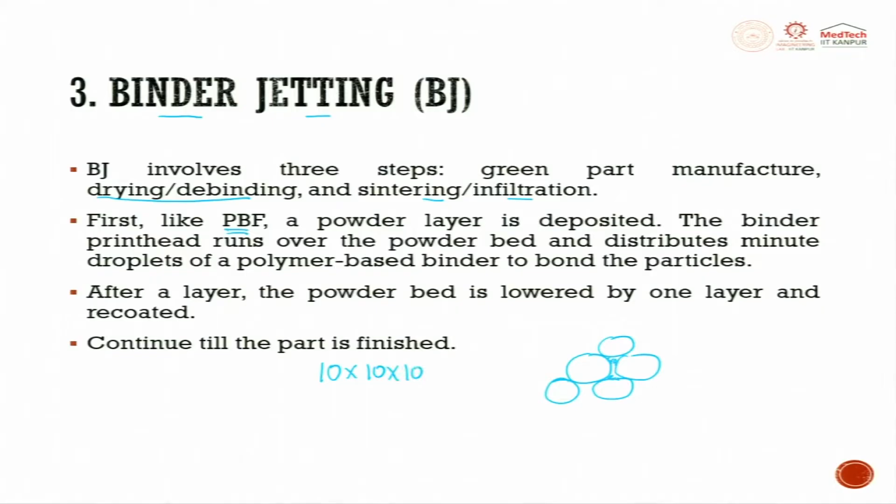Generally, if you are looking at somewhere around a 10 by 10 by 10 millimeter object, it will typically be made from somewhere starting from 1000 layers to 10,000 layers. If you do anything less than that, you get a very rough surface and the staircase effect dominates. So we try to maintain an optimum of 1000 layers, which means the machine will have to move up and down 1000 times to get the finished part.

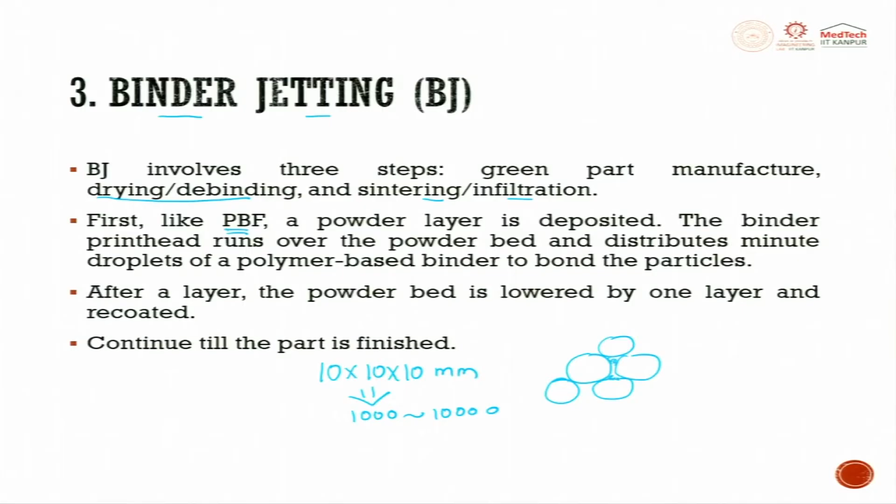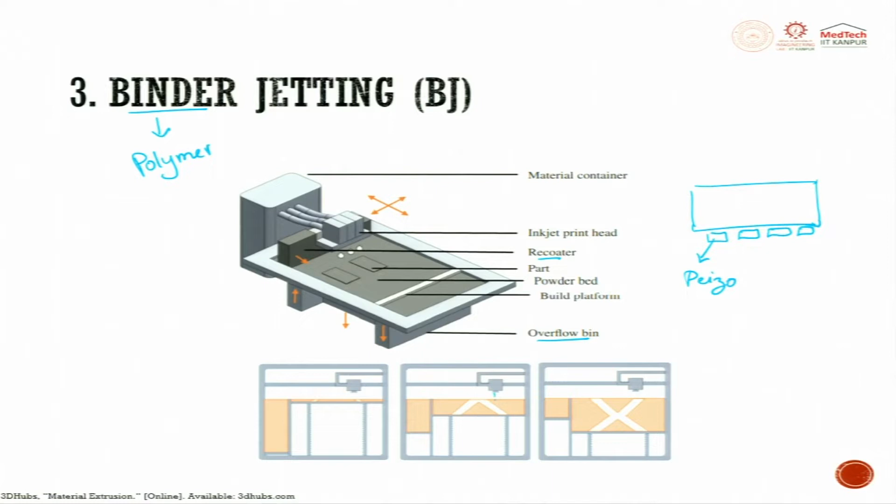So what is the advantage here? The shrinkage which happens can be reduced to a large extent as compared to that of laser.

Binder jet machine can regulate the build chamber temperature, which can be used to partially dry printed items. This is quite common in fused deposition modeling with polymers too, where there is also a build chamber temperature. Here, the build chamber temperature partially dries the printed item to prevent slippage when depositing the next layer, so the polymer will slightly evaporate.

The part stays in the machine until the binder is cured. After the process, nowadays along with the binder jet nozzles, there is drooping which happens.

Assume that next to the binder jet you have one more laser, a UV, deep UV, or blue laser. This laser tries to interact with the polymer and quickly cure it, which is called binder curing. So a laser gets attached with the binder jet to produce the desired output, and here the build chamber temperature will be regulated to some extent.

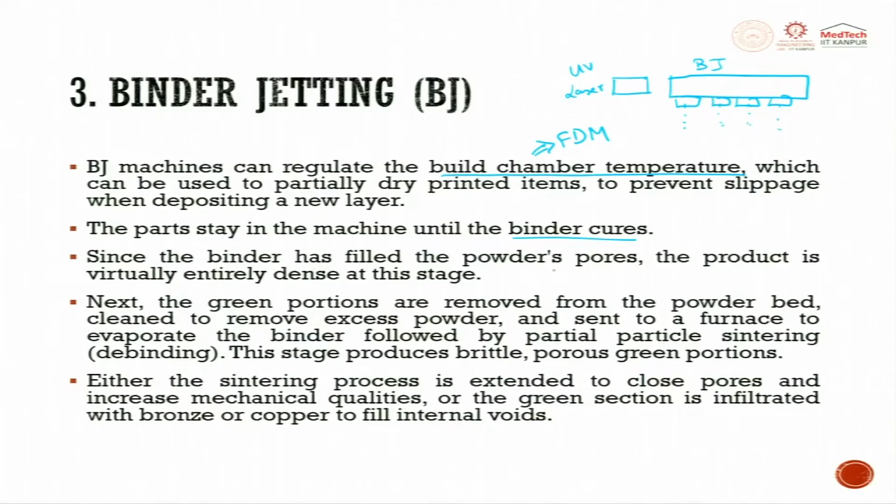Since the binder has filled the powder pores, once you do sintering you still have 95-96% density, with 3-4% pores remaining. That is where we try to do infiltration.

The part may remain in the machine until the binder cures, and you can use a laser for this curing. New machines are coming with this add-on feature.

Since the binder has filled the powder pores, the product is virtually entirely dense at this stage. It is called green - you can break it when you apply force, but once it goes to sintering it becomes hard. Next, the green portion is removed from the powder bed, cleaned of excess powder, and sent to the furnace to evaporate the binder, followed by partial particle sintering.

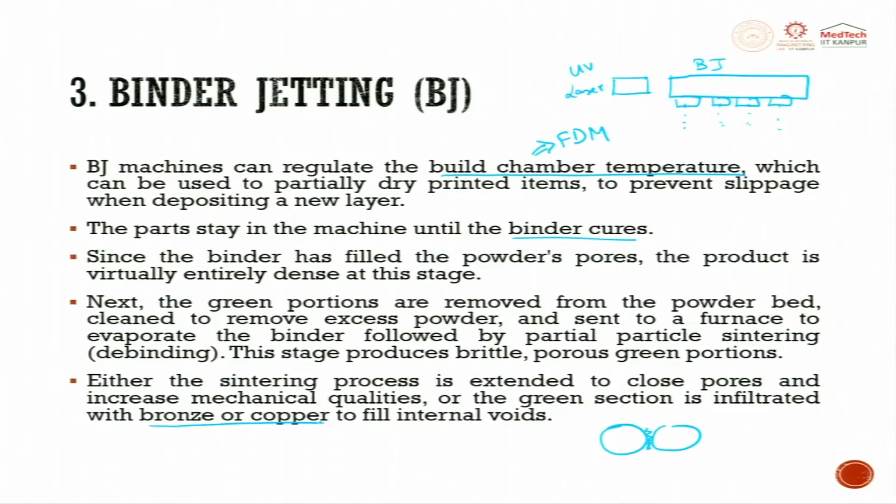This stage produces a brittle, porous green portion. Either the sintering process is extended to close the pores and increase mechanical properties, or the green section is infiltrated with bronze or copper to fill internal voids. So I have clearly distinguished between sintering and infiltration, which you choose depending upon your requirement.

When the copper is fed in, the copper's or bronze's viscosity is very important so that it can achieve capillary action into the part. Achieving capillary action is tough because the pore size is small and it is metal, so you need a very high negative pressure. Generally, it does not happen so easily.

If you still can't visualize it, imagine a sponge used for cleaning a table - as soon as you immerse the sponge in water, the water gets sucked into the pores. That is infiltration. If it happens by free atmosphere, it is easy; if not, you try to suck it in. So these things are done.

The first option shrinks the piece, which should be considered during design itself, because after this you go for sintering and there is going to be shrinkage, so a shrinkage allowance has to be given. The second alternative shrinks less and can be utilized to make two-material parts with tailored properties.

Binder jet made parts can achieve beyond 90% densification, although powder bed fusion and DED are difficult to match with this method. HIP reduces the pore size or porosity. Binder jet is a good production process for implants or structural pieces that require porosity.

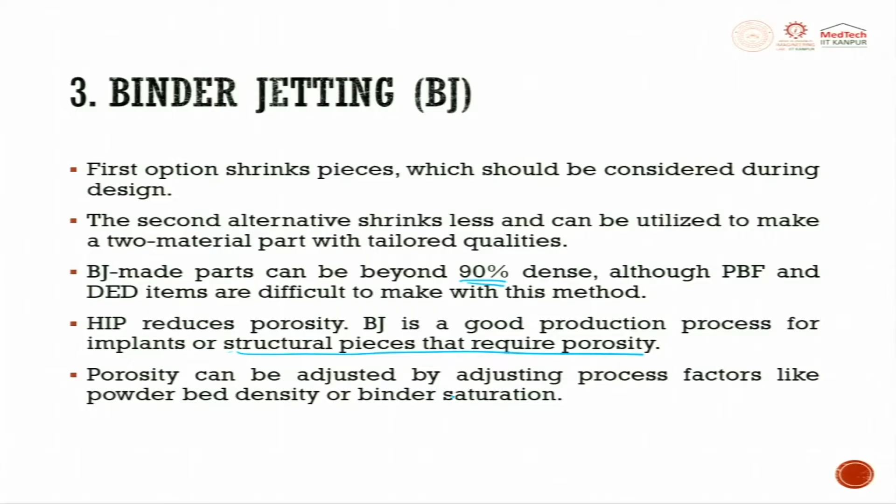This AM technique resembles powder bed fusion and material jetting - we will see what material jetting is later. It's similar to powder bed fusion with layered powder, but powder particles aren't fused with heat. Unlike powder bed fusion, they are bonded utilizing a binding liquid.

This is economically beneficial because laser and electron beam are expensive and require severe safety procedures. So, if you are looking for an economical way of producing metal additive manufacturing parts, binder jetting is one alternative.

The process is done in one place, and then you go to a sintering station next. In between you can try to have a drying station. These two steps do not involve much shrinkage, but during sintering there might be shrinkage. So, all these things have to be calculated upfront before doing the process.

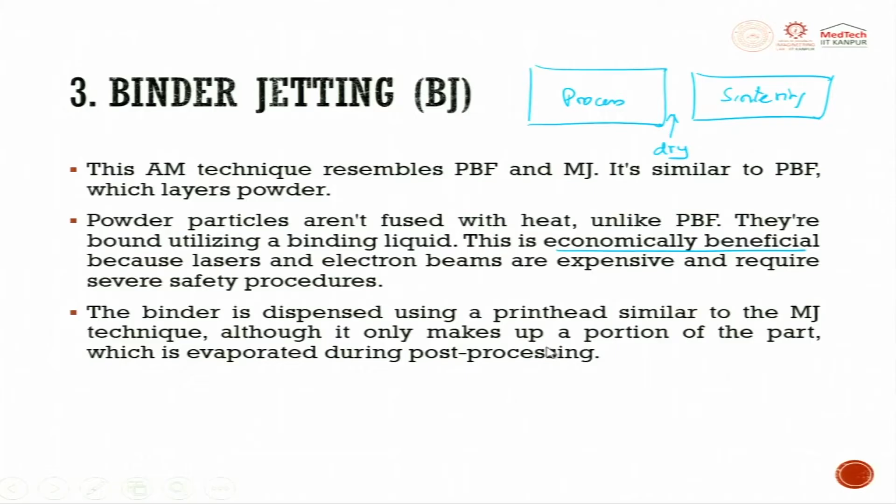The binder is dispensed using a print head similar to that of material jetting technique, although it only makes up a portion of the part, which is evaporated during post processing. Binder jet works very similar to your home inkjet printer.

In an inkjet printer at home, you see there are cartridges, and in those cartridges there are binders. These binders glue powder particles together instead of spraying ink on paper. This technology offers fast printing.

It is very fast. Today in additive manufacturing, especially in metal, we always look for productivity. So, this process helps achieve higher productivity, the ability to stack parts for efficiency, scalability, and print composition.

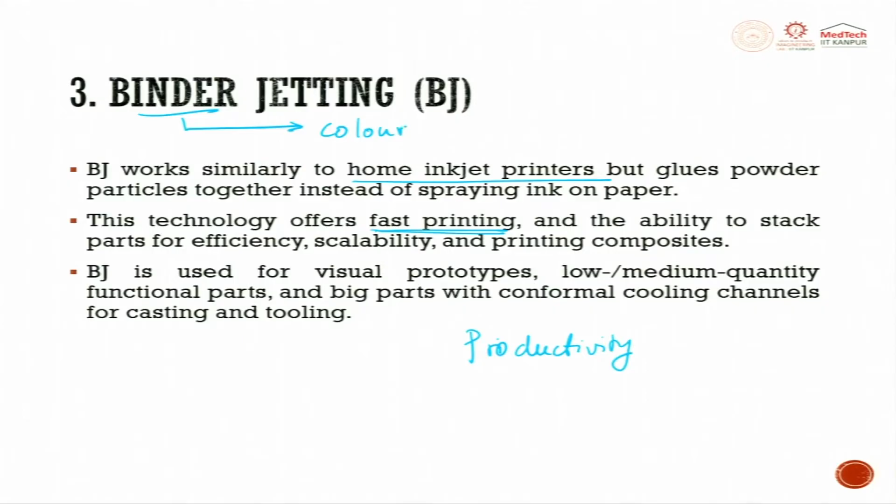Binder jet is also used for visual prototypes. In the binder, you can add color also for visualization. When you do sintering, the color will go off, but sometimes the color also gets retained. In the green stage, if you want, you can use it for visual prototyping.

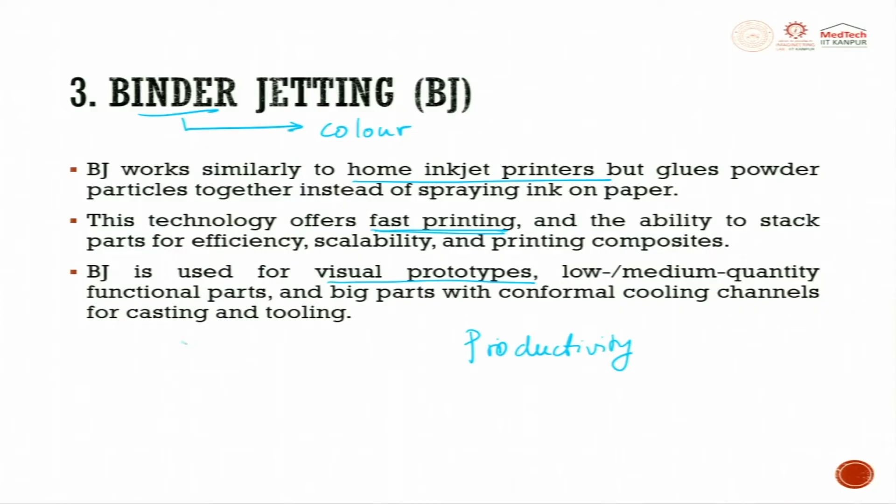Low medium quantity functional parts and big parts with conformal cooling channels for casting and tooling can be made using the binder jetting process. This is how the jetting technology works in action.

You also have the multi-jet fusion process. This method was created for non-metal powders and later used in metal systems by HP's new line of machines, metal jet. Two binders are placed on each layer: the fusing agent and the detailing agent. Two different agents are present, one called fusing agent, the other called detailing agent.

The fusing agent is deposited where particles must fuse to produce the part's cross section, that is fusing. The detailing agent is put around the fusing agent to define cross section borders. So two things are important: the fusing agent and the detailing agent, which together define the cross section.

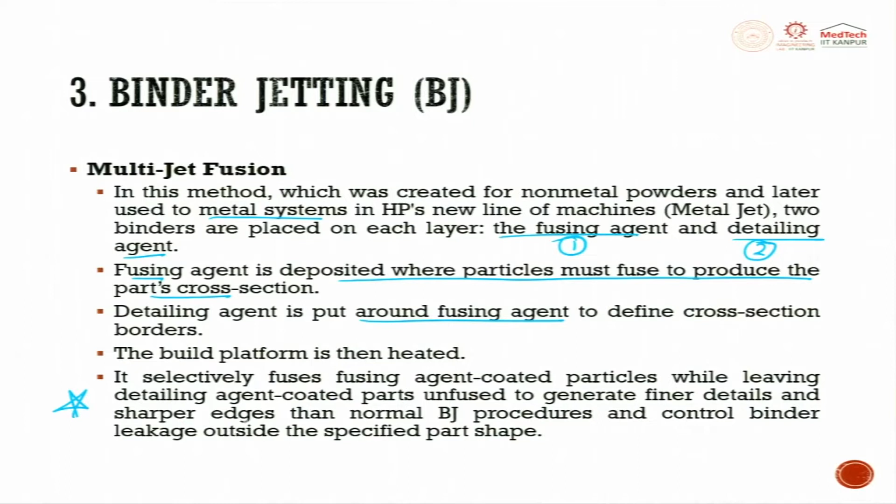This is a very important point to understand when we do multi-jet fusion or metal jetting. It selectively fuses the fusing agent coated particles while leaving the detailing agent coated parts unfused, to generate finer feature details and sharper edges than the normal binder jet procedure.

This is a schematic diagram for the multi-jet fusion technique steps. First, material is recoated, then thermal control energy is applied, then fusing agents and detailing agents are applied. Then it is exposed once again to temperature, so fusing is completed. You can see here which regions are fused and which are unfused.

The fusing agent is deposited through a piezoelectric inkjet nozzle. You will have several of these nozzles dropping fusing agent, and then detailing agent. There is a difference between these two polymers. Fusing happens on one side, and on the other side there is no detailing, which gives sharp edges between the unfused and fused regions.

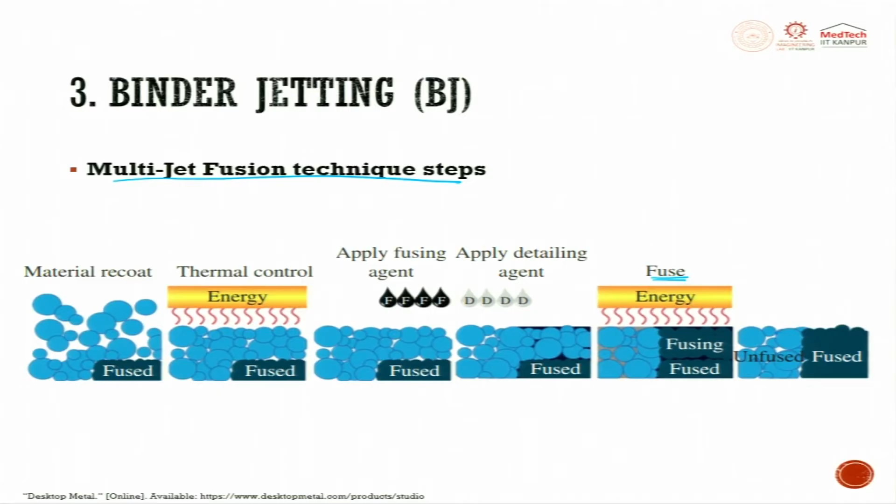This is a very interesting technique that is now gaining speed. Such wonderful details can be achieved by the binder jetting method. Here is a sample part made using binder jetting technology, showing wonderful features, hollow sections, and voids that can all be created.

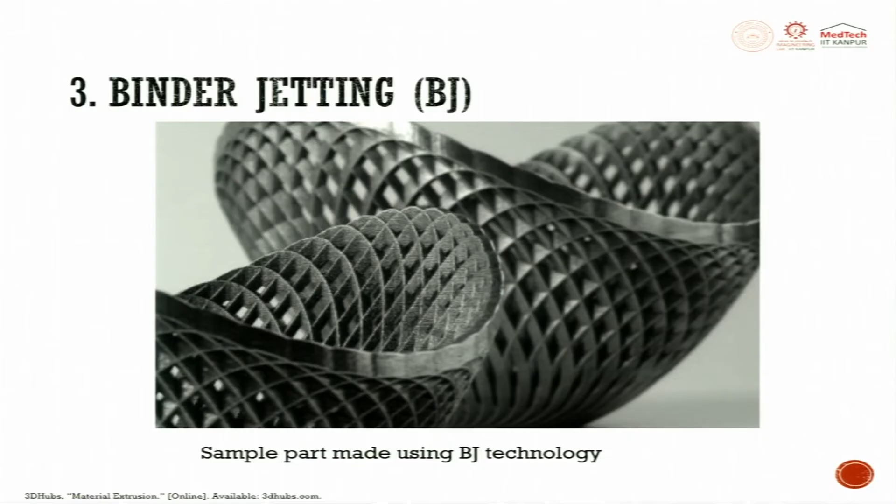Now let us look at the process features.

Great vertical resolution is attributed to tiny powder layers, so vertical resolution is extremely good due to tiny powder. Powder size is to some extent proportional to the roughness, because later when you fuse it these things go up, but to some extent. So in this technique it is almost proportional.

This technology's lateral resolution depends on the droplet size, quality and uniformity on one side, and their wetting properties on the other. What is wetting properties? When a liquid drops on top of a powder, or let us take a sheet of powder or a steel sheet, when a droplet falls on top of it, the characteristics of the droplet can be that it stays there rolling, or it can go down completely wetting.

So this is the powder or the sheet. Now here it is just spreading outside. When the wettability is good, it spreads outside, so you will try to have maximum contact. When you look at a powder microscopically, it will have surfaces like this. So when a droplet lands, through these small ridges, the polymer or the binder will have a capillary action and it can spread. That is what we are trying to talk about, the quality and uniformity and their wetting properties on the other.

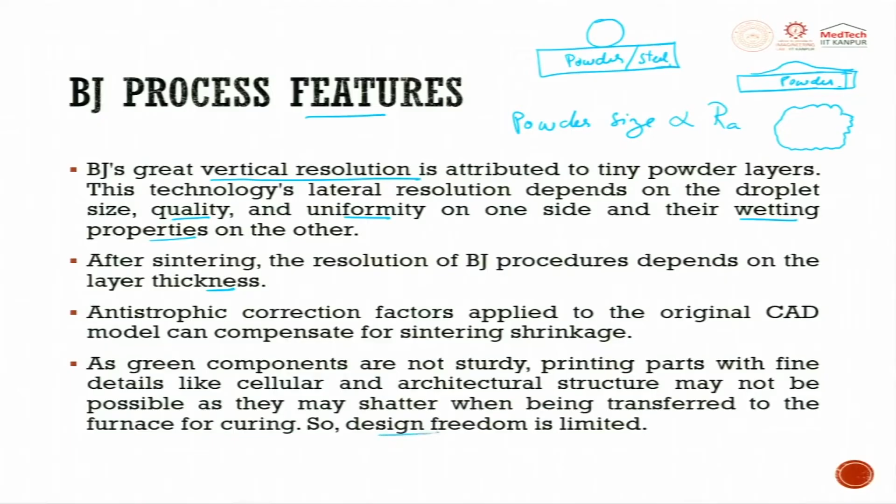An anisotropic correction factor applied to the original CAD model can compensate for the sintering shrinkages. As green components are not sturdy, printed parts with fine detailing like cellular and architectural structures may not be possible, as they may shatter when being transferred to the furnace for curing. So design freedom is limited when we are trying to look at this process.

The binder jet pieces are confined by the powder bed, therefore there is no need for a support structure. Big relief. When we do optimization, we also try to do support structure optimization, which takes a lot of time, and many times when you try to break the support structure, the component also breaks. So here you do not need that at all. There is no need for a support structure to transfer heat to the base plate.

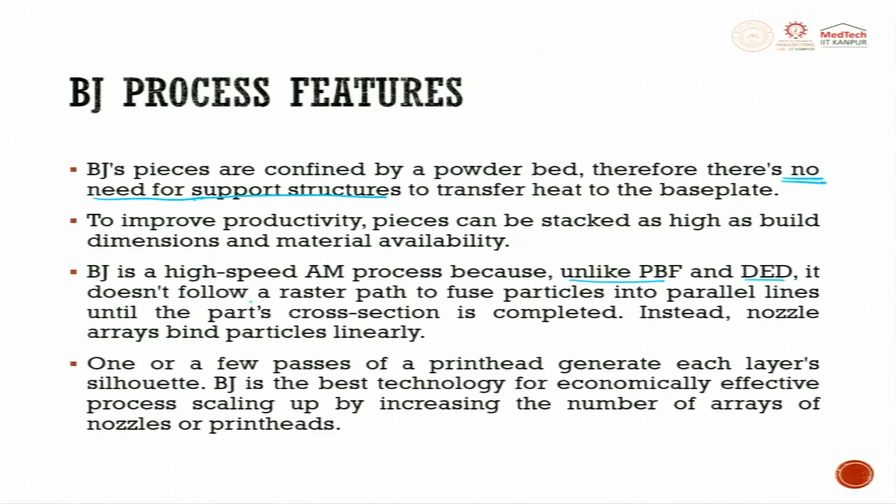To improve productivity, pieces can be stacked as high as build dimensions and material availability allow. Binder jet is a high speed AM process because unlike PBF and DED, it does not follow a rastering path, because laser or electron beam will follow a rastering path. So this is the hatch pattern, and in this hatch pattern it will follow a rastering path into parallel lines until the part's cross section is complete.

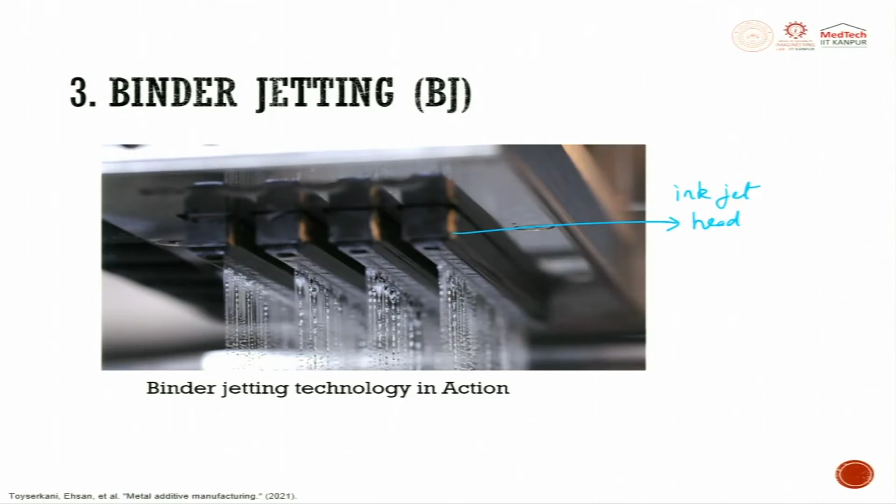Instead, the nozzle array binds particles linearly. That is what you saw here, how the inkjet heads are lined up and the nozzles downpour the binder jet. So one or a few passes of the printer head generates each layer. Binder jet is the best technology for an economically effective process, scaling up by increasing the number of arrays of nozzles or print heads.

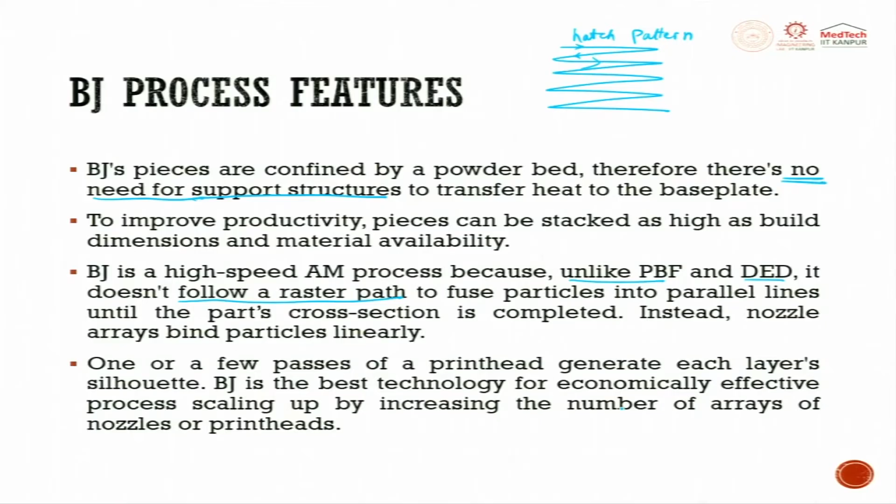So still, what are all the big challenges? Though it is very economical and very fast, there are still a lot of challenges and remedies. It is a complex AM system where numerous factors affect quality - viscosity, powder, all these things. Even though no beam optical parameters are involved, additional parameters need to be optimized to ensure appropriate bonding, acquire the goal porosity level, and maintain geometrical correctness. Even with adjusted process parameters, test layers are frequently needed to stabilize the printing.

The fabrication difficulties include nozzle clogging and poor binder dispensing. Nozzle clogging is a very big feature - while printing itself, if the nozzle gets clogged, then your entire printing fails. In FDM process also, if you do improper selection of material or process parameters, there is always a nozzle clog. The moment there is a nozzle clog, further printing will not happen, and the entire part will get damaged. So binder jet fabrication difficulties include nozzle clogging and poor binder dispensing. Commercial binder jet systems commonly include nozzle cleaning and print head health checking stations with automatic cleaning.

So in the system itself, they have a station. After printing, it goes there and they try to apply heat. They try to see whether all the nozzles are getting clogged. If so, then it tries to raise an alarm. So that is what we have - a nozzle cleaning station automatically inside the machine.

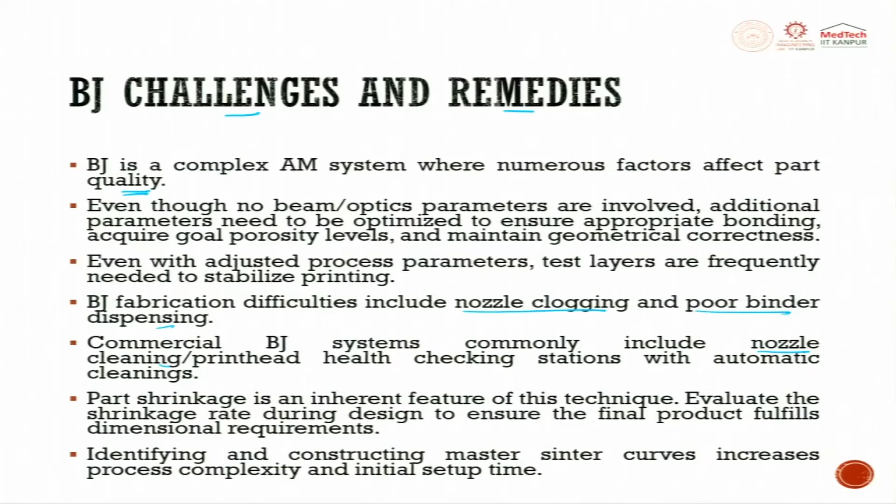So what are all the materials? Predominantly the binder jet materials are ceramics and polymers, and commercially metallic materials are restricted compared to PBF and DED. Binders can treat metals that cannot be thermally processed. As a powder bed based technique, BJ may only use one type of powder - alloying cannot be done here, it uses only one.

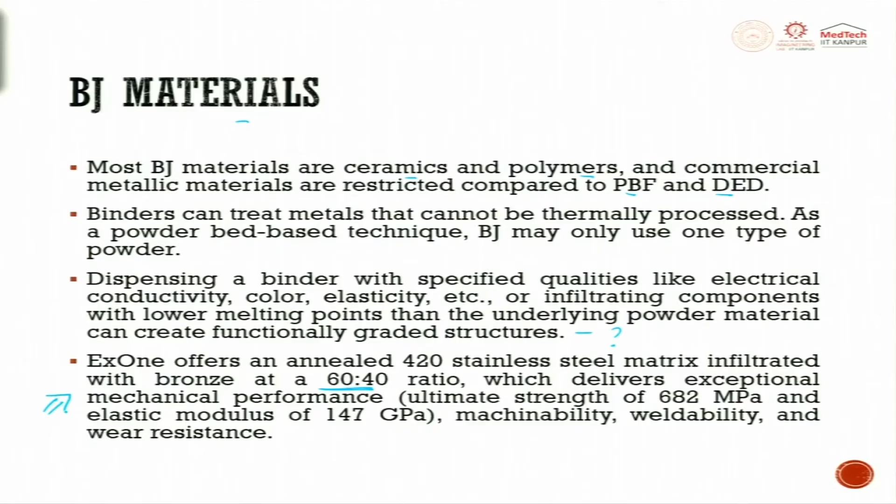Dispensing a binder with specific qualities like electrical conductivity, color, elasticity, etc., or infiltrating components with a lower melting point than the underlying powder material can create functionally graded material. This is a challenge, but people have started doing it. ExOne offers an annealed 420 stainless steel matrix infiltrated with bronze at a ratio of 60-40, which delivers exceptional mechanical performance, machinability, weldability, and wear resistance. So why I've given you this is so you can understand that original parts are being made for real-time application. So these are some of the products.

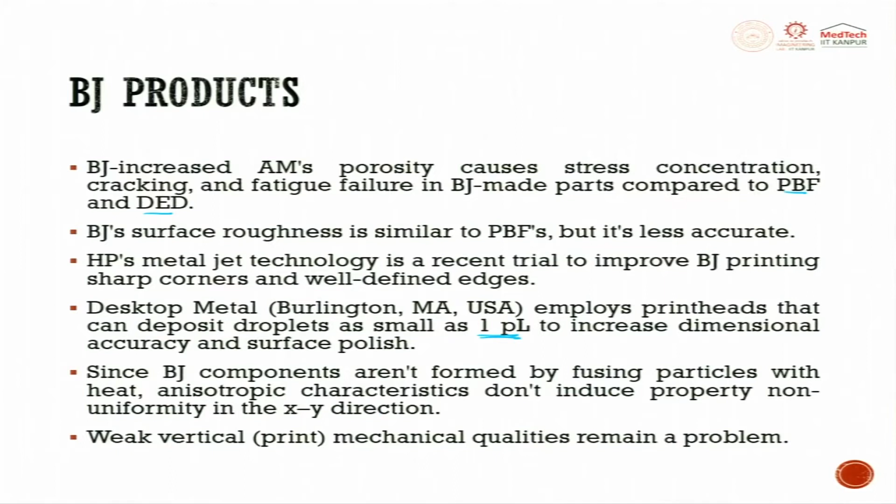So BJ increases AM porosity, causes stress concentration, cracking and fatigue failure in BJ made parts compared to DED and PBF. Binder jetting surface roughness is similar to that of powder bed fusion. HP metal jet technology is a recent trial to improve BJ printed sharp corners and well-defined edges. Desktop metal employs a printer head that can deposit droplets as small as 1 picoliter to increase dimensional accuracy and surface polishing - liter, milliliter, microliter, nanoliter, picoliter. Since BJ components are not formed by fusing particles with heat, anisotropic characteristics do not induce property non-uniformity in the XY direction. Weak vertical mechanical properties remain a problem even today.

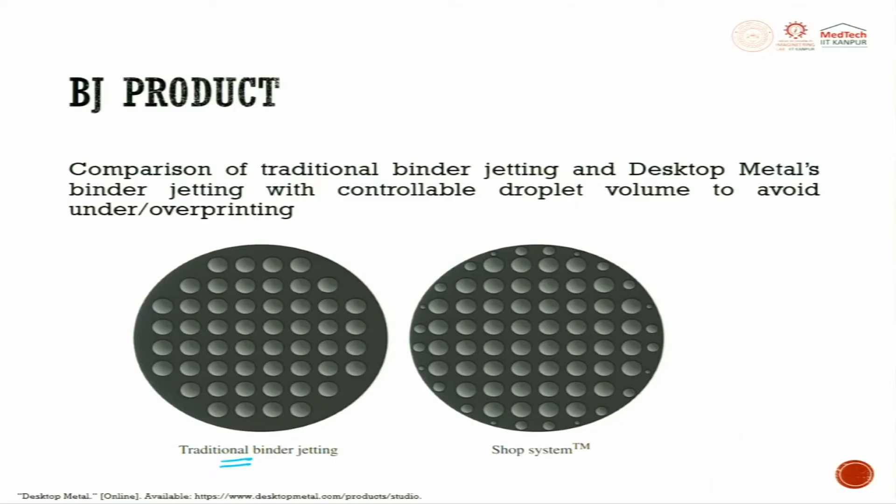So the next process is material extrusion. The process itself clearly says extrusion will be the principle or process involved in this type of process. So here we will try to extrude material through a nozzle and print it to develop the output. It looks very similar to FDM, fused deposition modeling in polymers - almost the same thing here we try to do with respect to metals.

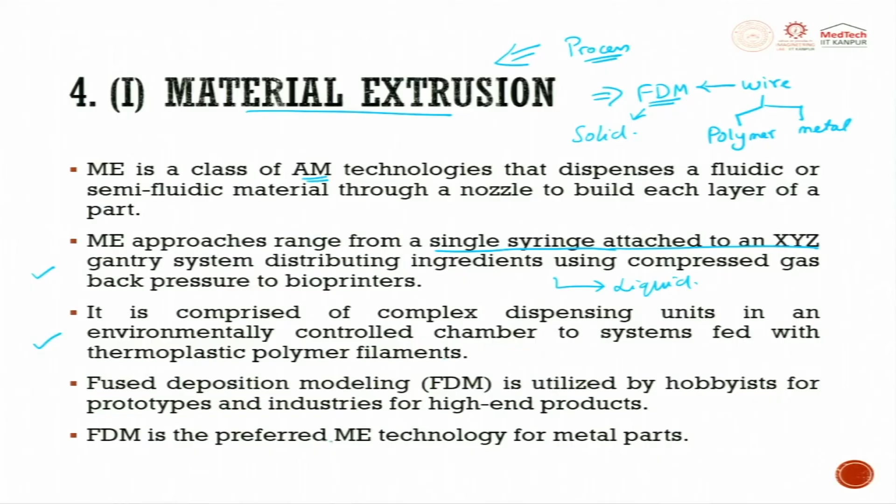So, fused deposition modeling is utilized by hobbyists for prototyping and by industry for high-end products. FDM is a preferred ME technology for metal parts, and it is almost the same process.

You have a filament spool, one, then you have the main filament supporting it, similar to your FDM process. Here, whatever spool we are talking about is a metal spool where polymer is mixed in. It is an IP process in extruding this wire, and it is not so easy. The cost can be a few thousand dollars per kg, or about $1,500 per kg.

So, where is the USP? The USP is here, in generating the metal spool. There will be a spool and there will be a supporting one.

So, like your FDM process, wherever there is a free hanging structure, support comes in. The support will be washed in a washing station, and the polymer here will, to some extent, be washed, but the rest will be degassed during the sintering process.

So, the supporting filament is there, and then we try to extrude it through the head, which is the extrusion head. Then it is printed, so the supporting structures are there for all free hanging structures. The entire thing is built on a platform. This is just like your FDM process, but the only difference is that here you have a material which is a metal spool, as compared to exclusively polymer.

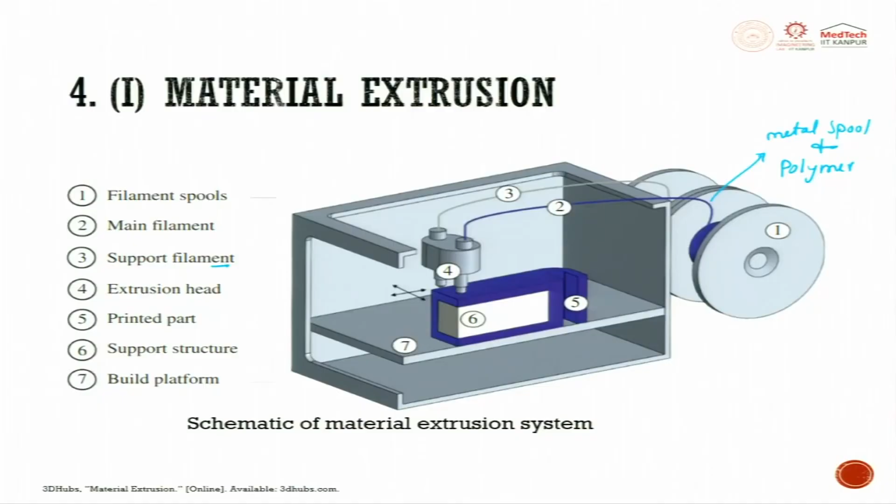So, you can also do the same process with a syringe, a liquid container, or a hopper, using pneumatic pressure to force the liquid metal through the nozzle to get deposited. There will be a lot of binder, here there is a solid binder. You can see here, this is the metal wire which is made.

So, some companies have developed FDM systems capable of processing metal to benefit this process. Today we have stainless steel, inconel, titanium, copper, mild steel, and other materials as well.

And these machines are expensive because the wires are already iterated for the process parameters, and these process parameters are set on the machine for printing. So, it is almost an IP process, and the process parameter selection is also inbuilt. The machine, as of today, is pretty expensive.

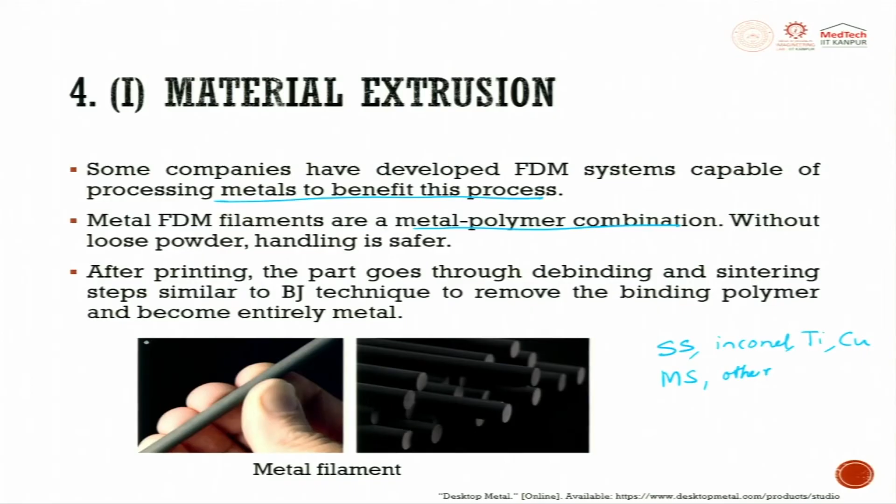The metal FDM filaments are a metal-polymer combination. Without loose powder, handling is very safe here. After printing, the part goes through debinding and sintering steps, similar to the binder jet technique, to remove the binding polymer and become entirely metal.

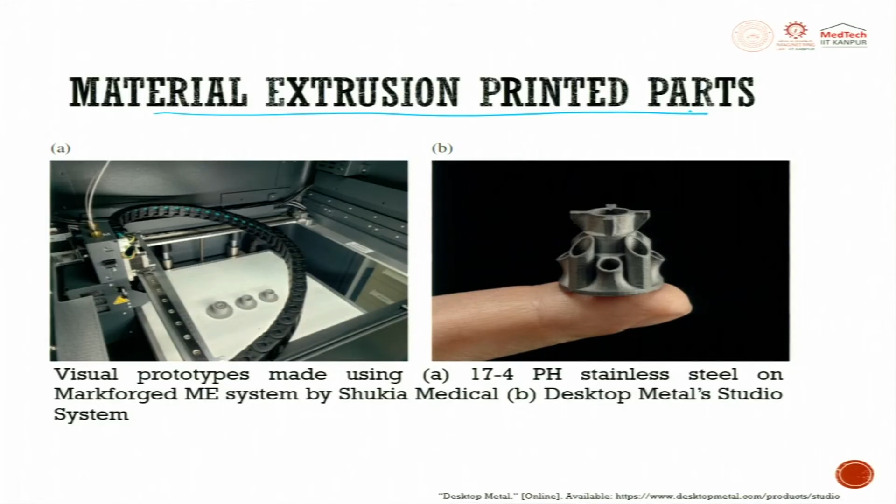So, you can see such small parts can be printed. This is a desktop metal studio system used to print these, and here you can see how the material extrusion printer head looks like. These are the three parts which are printed.

So, the other one is material jetting. In material jetting technology, fluid droplets are deposited on a substrate to make a component. For example, think of it like welding: we pass a welding rod, and a very high current between the welding rod and the workpiece causes the electrode to melt and get deposited. In a similar way, we try to do material jetting, where fluid droplets are deposited on a substrate to make the component.

So, material jetting additive manufacturing is compared to binder jet. The material needed to make a part is deposited from a print head. A polymer print head is easy, but here you should have a metal which is liquid and passing through it, and you have to control viscoelastic behavior. The part is created in an empty space rather than a powder bed.

It is just like a bed, and droplets of metal come, and you try to control the layer shape of whatever is being done. This method is cheaper than additive manufacturing systems using laser and electron beam.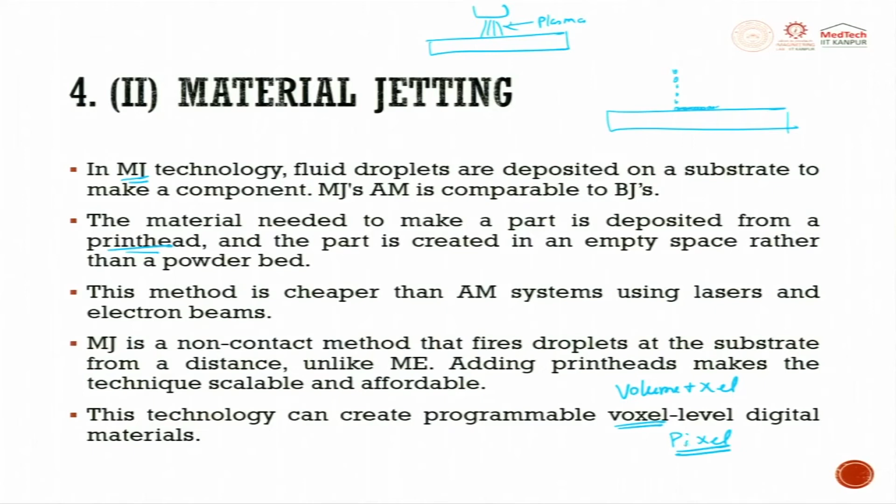There will be a plasma which is used to melt the material and then deposit. So adding a print head makes the technique scalable and affordable. This technology can create a programmable volume voxel. So when we say pixel, it is picture cell, 2D. This is a volume cell, voxel, a digital material.

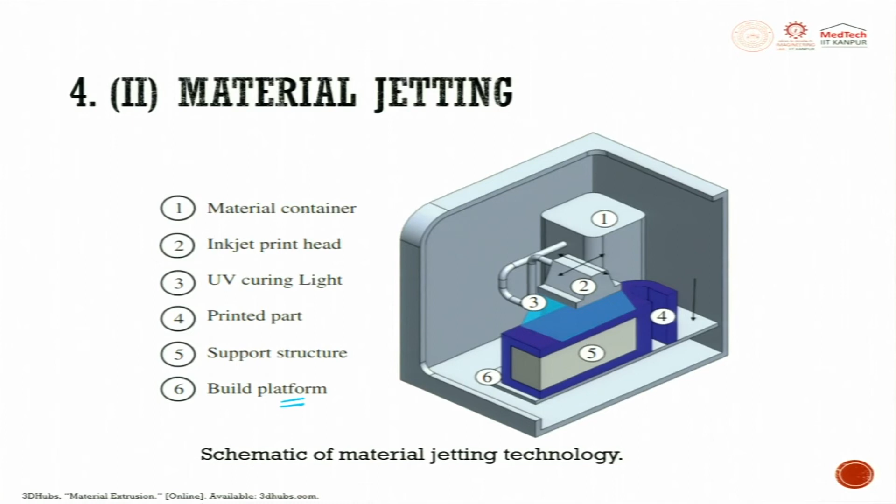So the setup looks like this: there is a material container, an inkjet printing head, then a UV curing light, then you get the printed part, a support structure, and a build platform. This is another technique which is exhaustively used for metal jetting or material jetting.

The print material is transferred from the container to the print head. If the target material isn't already a liquid, it must be melted, dissolved, or suspended. It is interesting - you heat it, or you dissolve and suspend it into a fluidic media, so then it can be dropped.

Back pressure then ejects material from the nozzle aperture to produce a droplet. This is an important point which you should record: back pressure ejects the material from the nozzle aperture to produce a droplet.

A heater attached to the fluid reservoir evaporates the adjacent material to generate a bubble. Say for example, this is the reservoir, here is a heater. A heater attached to the fluid reservoir evaporates the adjacent material to generate a bubble. When you heat it, there is a bubble, and this bubble will try to push, and you try to get droplets.

In piezoelectric jetting, the expansion and contraction of a piezoelectric ceramic, driven by an electrical current, deforms the fluid reservoir and ejects the droplet. So you have a bubble, and when you heat it, the bubble expands, and when it expands, it tries to push the material down.

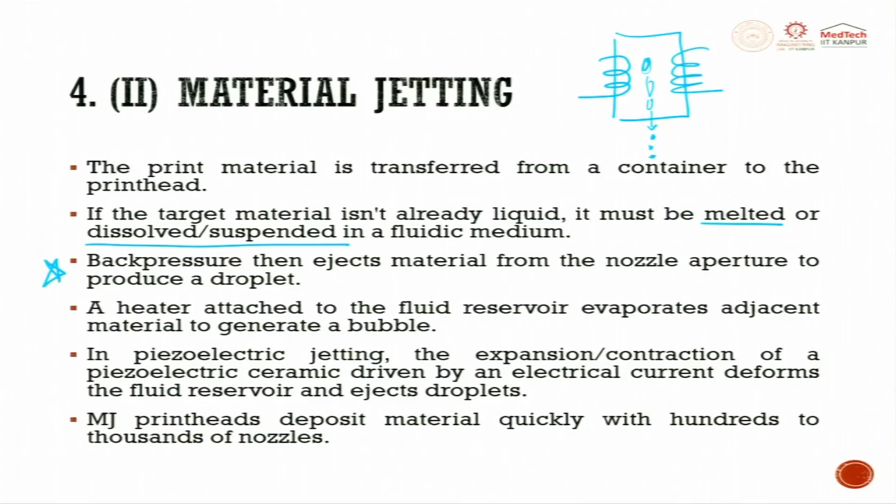Material jetting print heads deposit material quickly with hundreds or thousands of nozzles. Drop-on-demand printing releases the droplet as needed. The droplet agglomerates on the substrate and solidifies through cooling. So drop-on-demand means wherever you want, the droplet is deposited. You heat it, or a bubble expands and pushes the material down.

Drop-on-demand printing releases the droplet as needed. The droplet that forms agglomerates on the substrate and solidifies through cooling, solvent evaporation, chemical reaction, or photopolymerization, continuing until the component is complete. A solitary print head prints sacrificial support material.

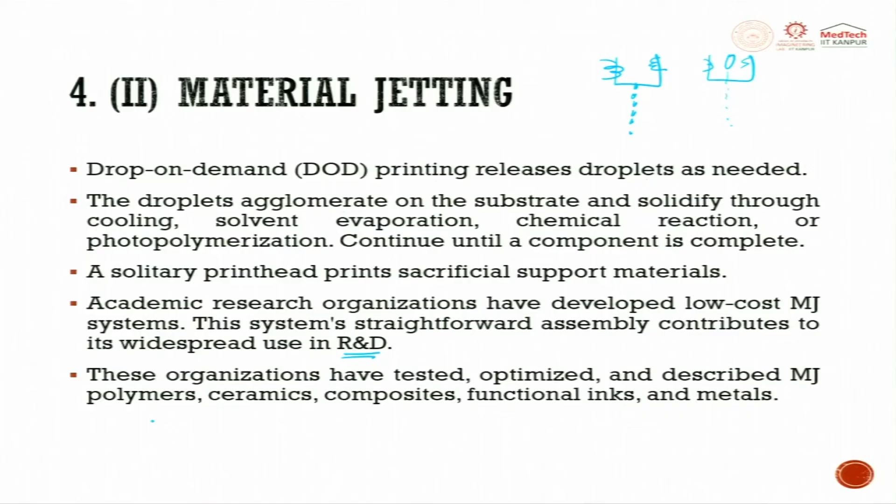Academic research organizations have developed low-cost material jetting systems. This system's straightforward assembly contributes to its widespread use in R&D organizations. These organizations have tested and optimized MJ polymer, ceramic, composite, functional inks and metals. Printed material is transferred from a container to a print head.

The two big companies, Stratasys and 3D Systems, have provided high-end MJ systems. XJET is the first commercial metal jet printer firm. Why am I giving all these company names? So you shouldn't feel that all these things are still only in the research front, only in the lab. No, there are machines, there are companies using it, there are parts being produced and put into action. So the next era of additive manufacturing is going to be predominantly metal-based additive manufacturing.

In the nanoparticle jetting technique, inks made of suspended metal nanoparticles in a liquid media are jetted onto the substrate with supporting material. So the jetting comes, and these nanoparticles are used for biomedical applications, or for conducting applications. So on top of a polymer, you just eject this material and try to get it.

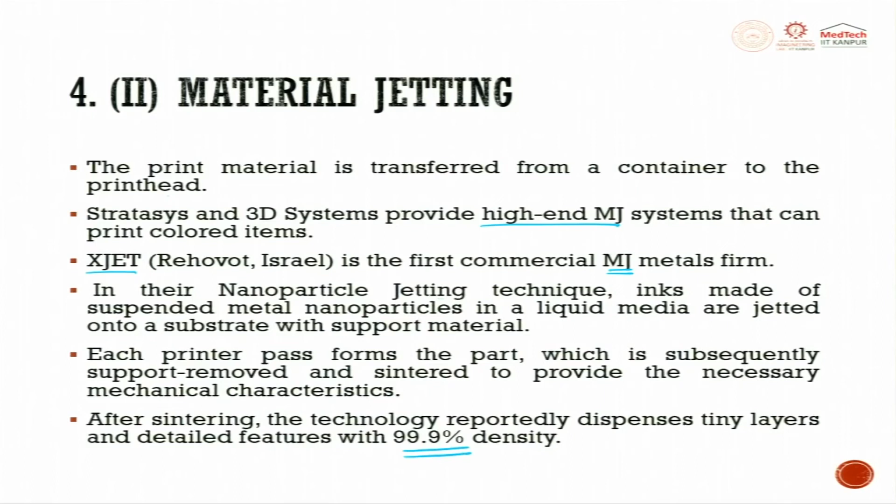Each printer pass forms the part, which is subsequently support-removed and sintered to provide the necessary mechanical characteristics. After sintering, 99.9% densification can be achieved in this process. So this is how it looks. Jetting technique is one of the emerging metal additive manufacturing methods.

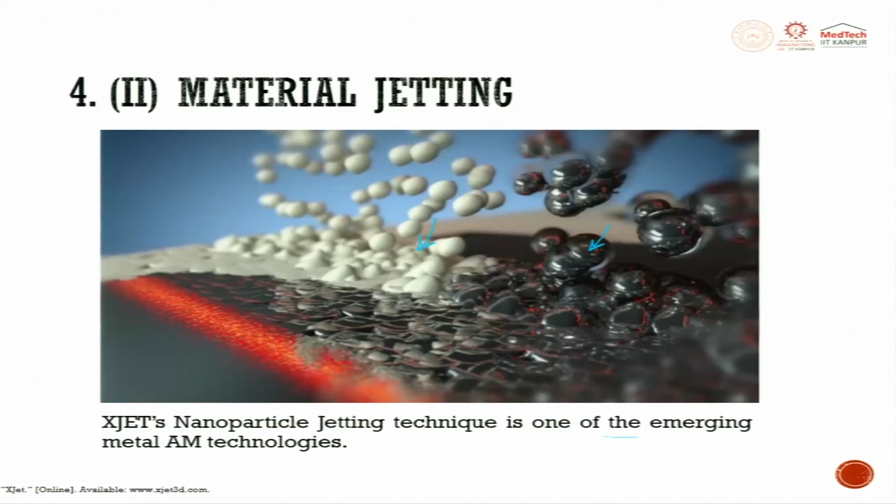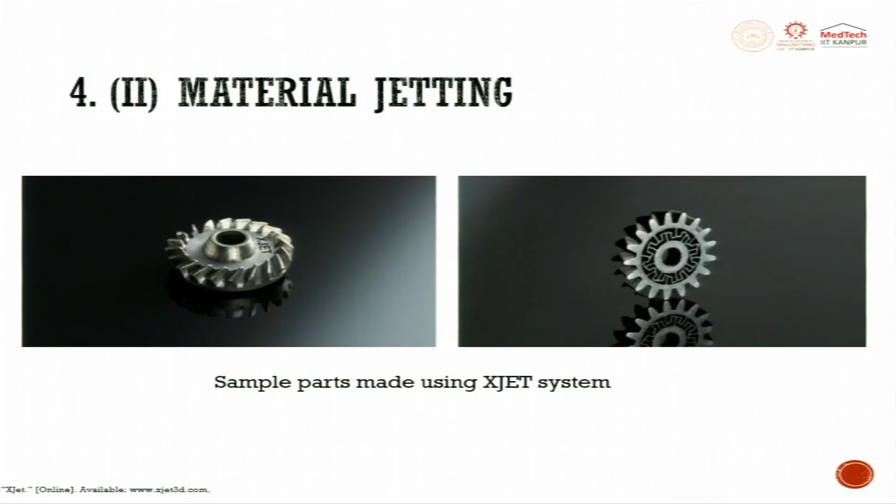So you can see these are metal, these are all polymer, this gets deposited so that you get the required output. These are some of the gears which are made by the material jetting process. You can see here these spur gears are made, then bevel gears are made.

The last process for discussion is sheet lamination. As I said, sheet means it is 2D. So powder you can call it as 0D, wire you can call it as 1D, sheet you call it as 2D. Naturally, when you use powder you get high resolution as compared to wire and 2D sheet.

Sheet lamination, SL, is used for metals. When we talk about sheets, these are all thin foils or films, not plates. Before solid state joining, these sheets can be trimmed to reflect a layer cross section, or extra material can be eliminated after the sheets are linked to generate a particular height.

Then we try to use an ultrasonic sonicator or a brazing binder metal, such that between one sheet and the other sheet you try to have some fluid - this is the binder. This will be ultrasonically vibrated so that it spreads and attaches, or you use ultrasonic so that by heat it tries to join.

The heat involved is very minimal. Predominantly, what the ultrasonic process does is clean the oxidation layer so that nascent material comes into contact and tries to join. In this process, two metal sheets are stacked and an ultrasonic tool travels over them to remove the surface oxidation through high friction.

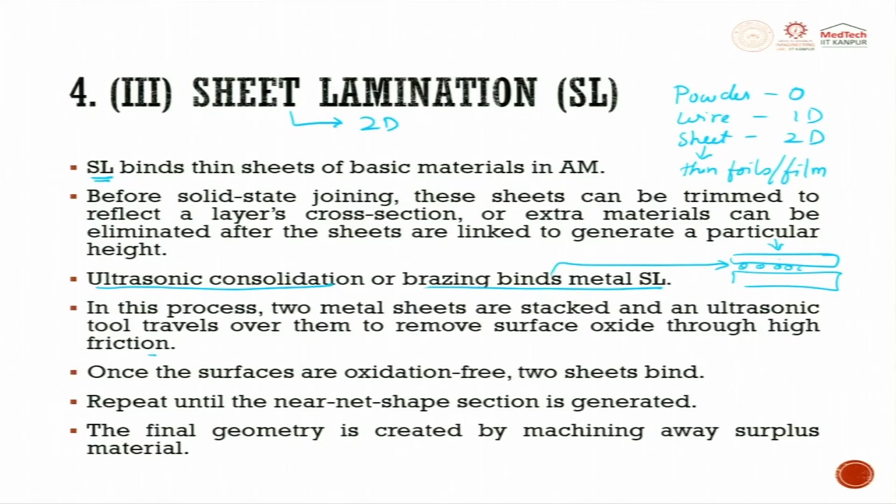This process is done at temperatures considerably below the melting point of the build material. Therefore, it does not change the microstructure or the mechanical property. Important point.

A few ultrasonic consolidation compatible material pairs are: aluminum alloys can be combined with beryllium, copper, gold, magnesium, molybdenum, nickel, titanium, silicon, tantalum, etc. Aluminum can be mixed with all these things.

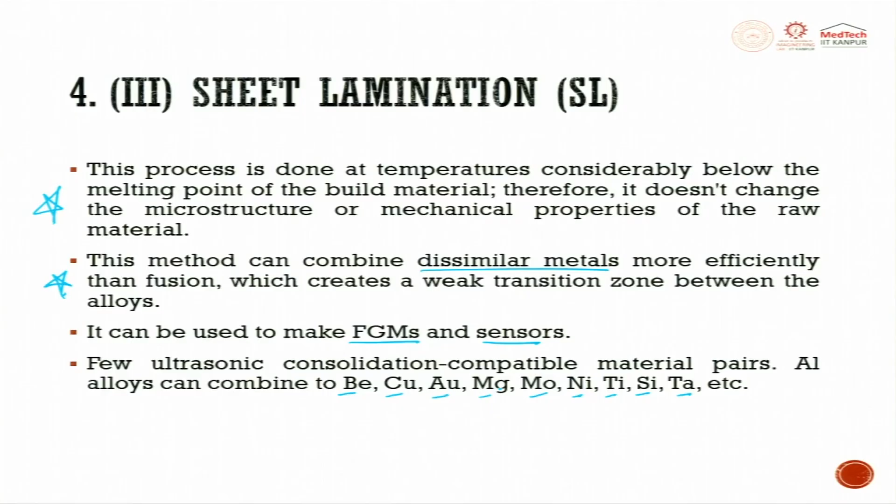So this is how it is. First, the ultrasonic motion causes the oxide layer to break, then localized asperities yield so that it tries to join, and heat and pressure are applied so that you get the joining done between the layers.

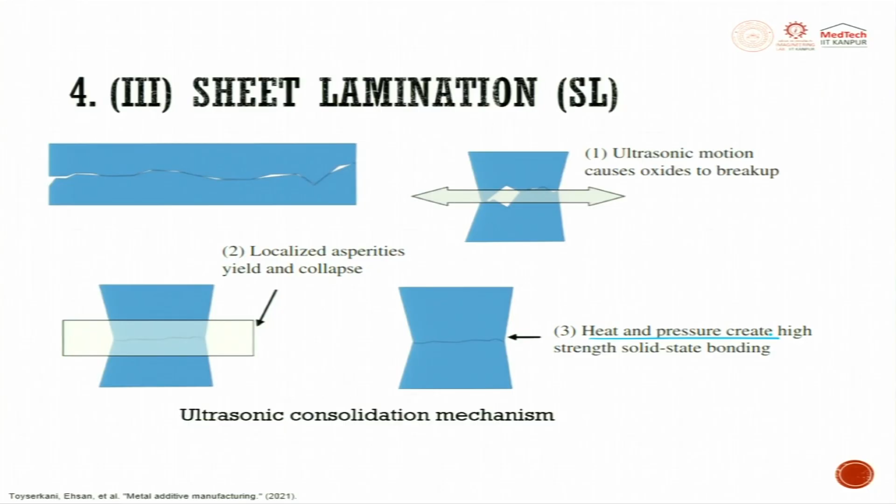These are some examples where it has been made. FGM parts have been used by Fabrisonic - fabrication and ultrasonic, the Fabrisonic ultrasonic consolidation system. A part possesses two materials. Smart structures have also been embedded using this sheet lamination process.

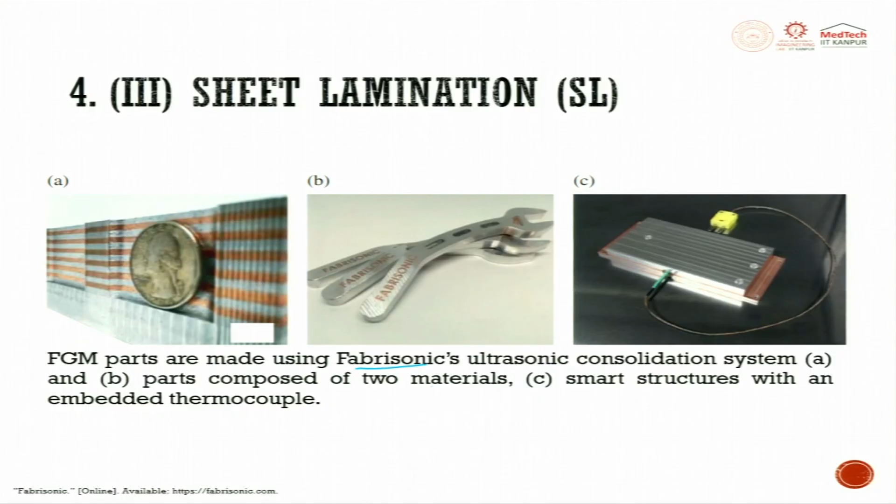So, points to ponder. Till now we have studied the most significant or most used processes in metal additive manufacturing. The first one is powder bed fusion, wherein you use laser or electron beam, and sometimes also plasma. Next we saw directed energy deposition, then binder jetting, then material jetting, then material extrusion, and finally sheet laminate metal additive manufacturing process.

So the points to ponder are: process, material, advantages and disadvantages of all these processes. You are supposed to note it down and write it. Use any reading or open source available material.

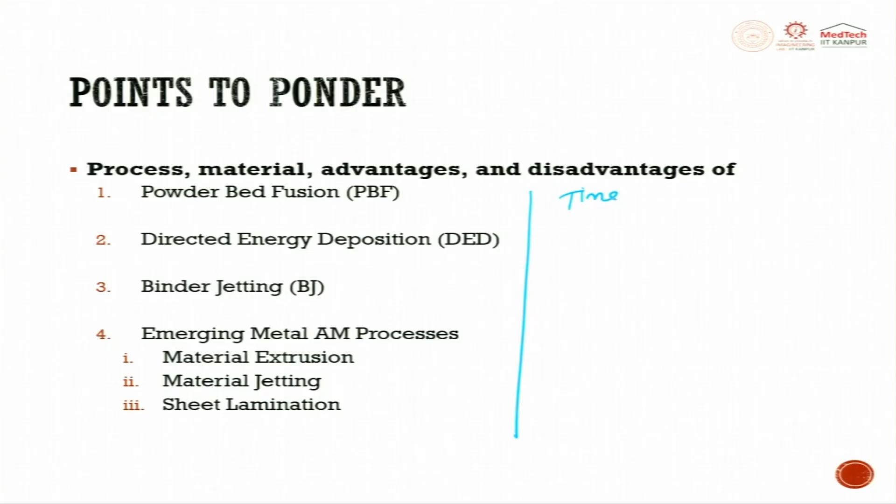Try to write down time, strength, roughness and porosity. Keep those parameters as the evaluating criteria and write the process. Then also write a remarks column for each of these processes. If you prepare this table, you will try to understand the different types of processes and their capabilities.

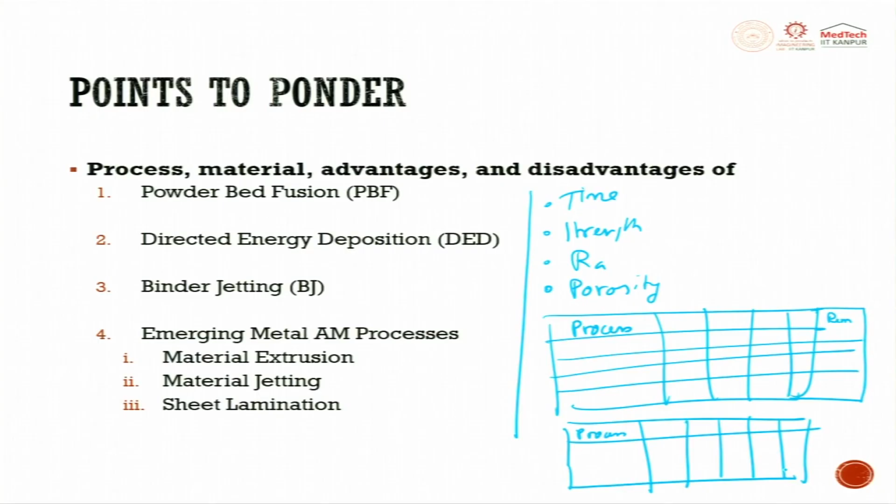Now, once you finish this, you will build one more table wherein you try to write down the process and different types of materials which can be used for building the output.

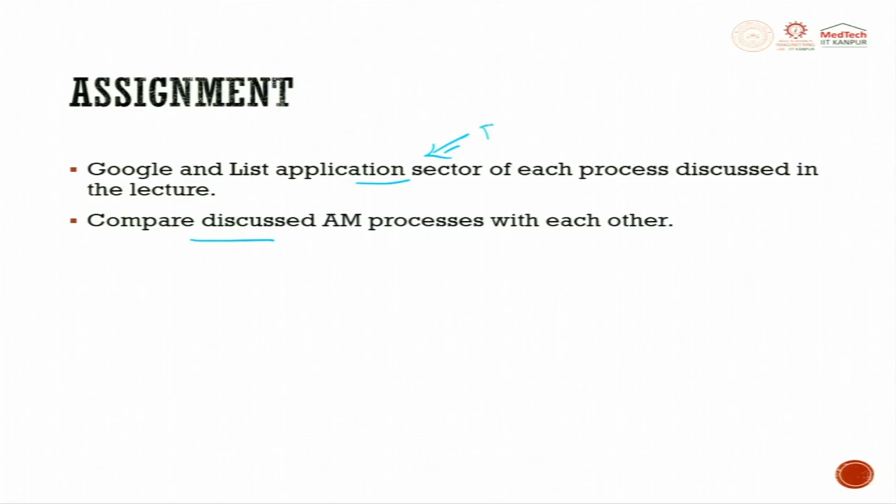So, the assignment I have already given is: compare and discuss these additive processes, then list down various application sectors where we use binder jetting, metal jetting and extrusion application, and sheet metal. Please go through this open source material available and write it down, prepare a table so that it will be helpful for you for the examination.